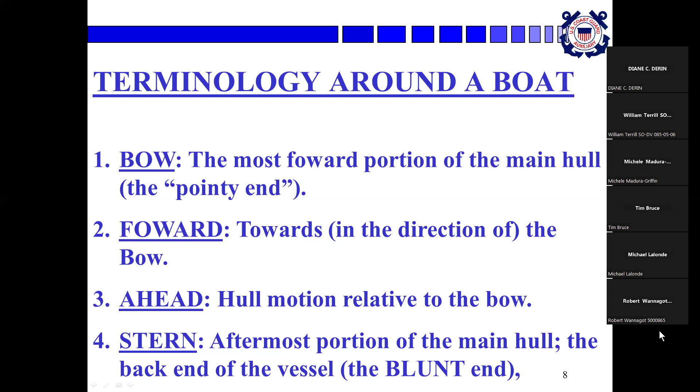Terminology of the boat. Everybody knows that the bow is the most forward portion of the main hull, the pointy end, and forward means anywhere towards the direction of the bow. Ahead is a motion relative to the bow, so the ship was moving ahead. The stern is the aftermost portion of the main hull, the back end of the vessel, the blunt end for most ships and boats.

Aft is the direction of the stern, towards the back end of the boat. And astern is the direction of the hull's motion relative to the stern, which means you're backing up, a backing motion relative to the bow.

Sides: looking towards the bow from the stern, on either side of the keel. The right side is always starboard, your left side is always port.

First terminology: there are no right or left sides on the water, again it's only port and starboard. Beam is the widest point of the hull, gunwale to gunwale. Athwartship is any measurement made from one side of the hull to the other at 90 degrees to the keel, so you can measure that anywhere you want, up or down, as long as you're measuring across — that's athwartship.

Terms denoting hull shape. Sheer is the curve or sweep of the deck from bow to stern of a vessel when viewed from the side, which we're all used to looking at. Flare is the outward curvature of the sides of a boat near the bow, looking head on, which helps keep the vessel's decks drier, usually on a motorboat moving fairly fast.

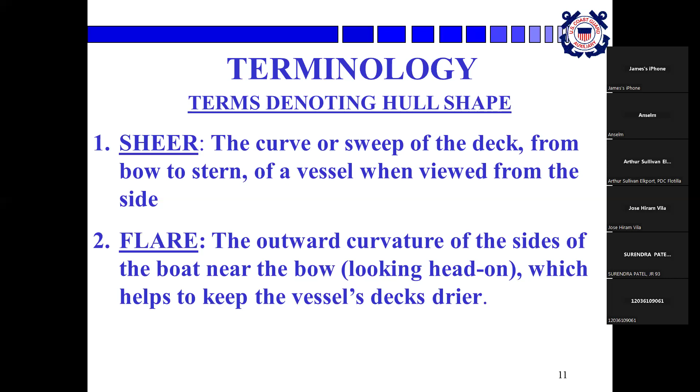The hull's bottom: a flat bottom has little or no lateral curvature when viewed from either the bow or the stern, so we know what a flat bottom boat is. A round bottom, when viewed from the bow or stern, shows a definite roundness, curving down and inward from the deck towards the keel.

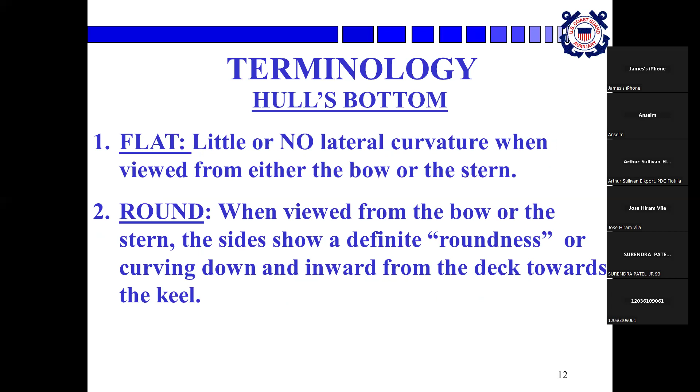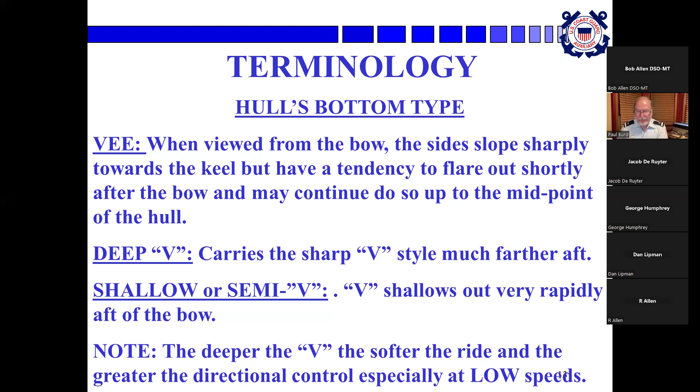Now the V. When viewed from the bow, the sides slope sharply towards the keel, but tend to flare out shortly after the bow and may continue up to the midpoint of the hull. V's are very common in our boating public. A deep V carries that sharp V style much farther aft, designed to give a better ride. A shallow or semi-V shallows out very rapidly after the bow. The deeper the V, the softer the ride and the greater directional control, especially at low speeds.

Displacement: when loaded, it sits low in the water. The flotation depends on the amount of water displaced by the hull, meaning the water displaced is greater than or equal to the weight of the vessel. Displacement hulls are usually slower vessels. Planing hulls sit up on top of the water, fast moving; flotation does not depend as much on the amount of water displaced by the hull, but on load capabilities from dynamic actions between the hull's bottom and the water's surface. This has a lot to do with efficiency, the way it moves through the water, which is why some hulls are designed as displacement hulls and others as planing. If I remember correctly, the Coast Guard's 44-foot motor lifeboat has displacement design on the front and planing on the rear, designed specifically for heavy weather.

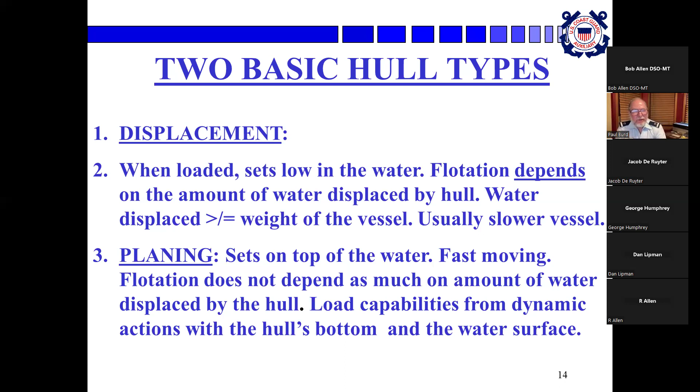Okay, planing hull. The planing hull is designed so that as soon as you get some speed, the hull gets up on top of the water. That way it's much more efficient, and there's less drag. You know the drill.

The trunk does not extend fully from gunnel to gunnel, it has walking space on both sides - that's the cabin. The raised deck does extend all the way from gunnel to gunnel, and there's no walking space on either side. Those are the two basic cabin styles.

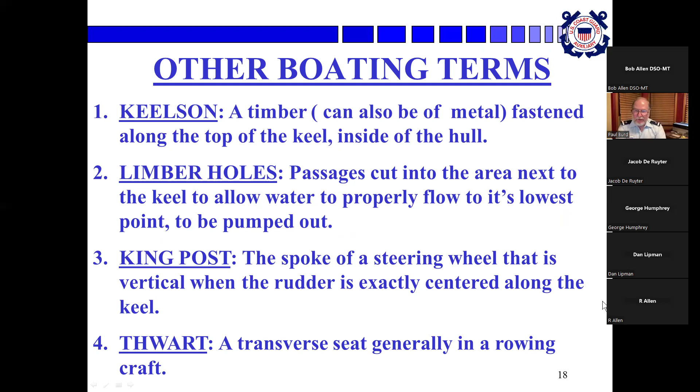The boot top, that's the general area of the exterior hull at the waterline. A lot of boats have a little line painted around it too.

You'll see it often. A thwart stanchion, that's a vertical support for the transverse seat. So if you've got a seat that sits across your rowboat, that's the thwart, and the stanchion sits underneath it, because if you're heavy like me, it might be too much weight for it. Next.

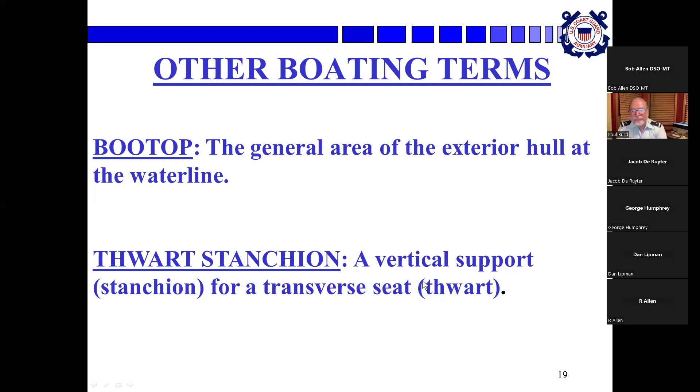Other boating terms, the boat motions: pitch, that's the up and down vertical motion of the bow as the boat rotates around its lateral axis. Roll, that's gunnel to gunnel motion of the hull as it rotates around its longitudinal axis. And yaw is a swinging motion of the bow from side to side as the hull rotates around its vertical axis. We've been going through this fast because I know you guys already understand most of this, but we do know the pitch versus the roll.

Some people - let me put it this way, we've had bad experiences with pitch and stuff. So next.

Dangerous boating motions. Broach, that's downhill, at a fairly high speed, the bow sharply digs into the surface. If floods are significant, it washes the main decks. And capsizing, what's that?

Capsizing, that's when the vessel rolls over, bottom up. You almost don't recover from those.

Pitch poling is commonly following a broach and loss of direction control. The bow plunges deep, turns sharply to one side, the vessel rolls and capsizes - a violent, potentially lethal maneuver.

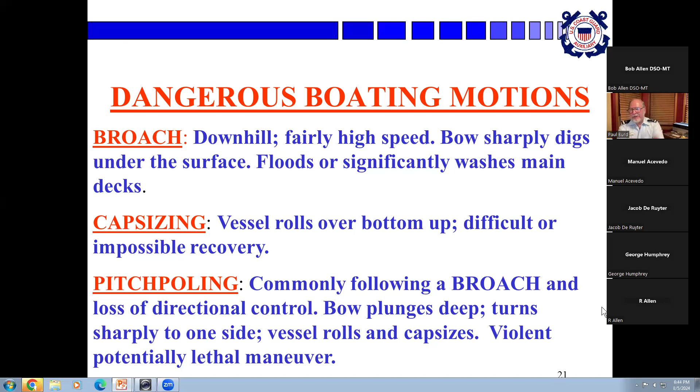Next, sailboat configurations. Identification depends on the number of masts and the sails and where they're placed. The graphics which follow are highly simplified examples.

I know that everyone has seen a sailboat and some of the different riggings that are out there, but we'll go through them. For the test at the end of the chapter and at the end of the course, these are the things you'll need to know. So next.

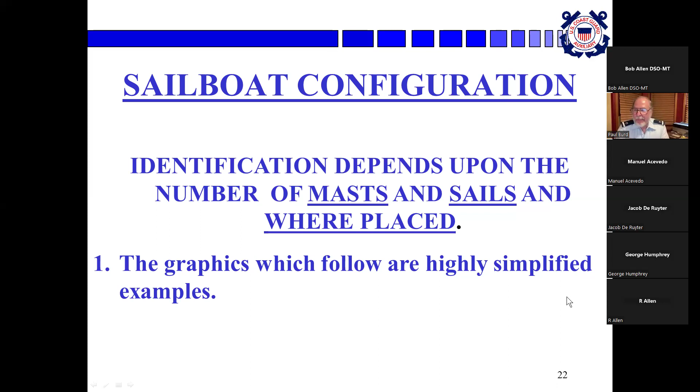Catboat configuration, that's the simplest of them. You could even have a rowboat set up this way as a sailboat. It's a simple boat, single mast, one mainsail, usually in the front, and very simple. Some people are really good with these things, they even race them. This is the catboat design. Next.

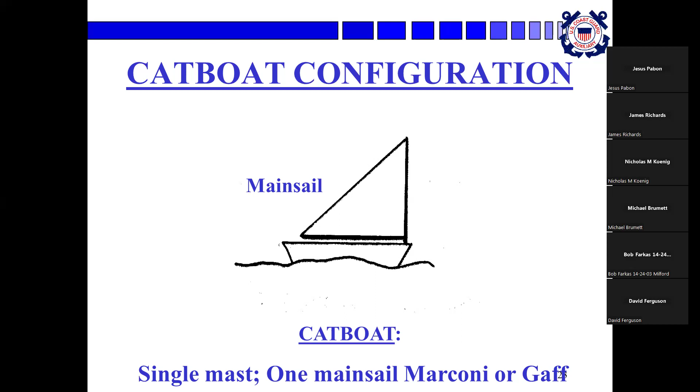Sloop configuration has the mainsail and a jib, and that's a really common setup for a sloop. It's the mainsail and the jib with only one mast, and it's forward, usually mounted forward in the boat. Next.

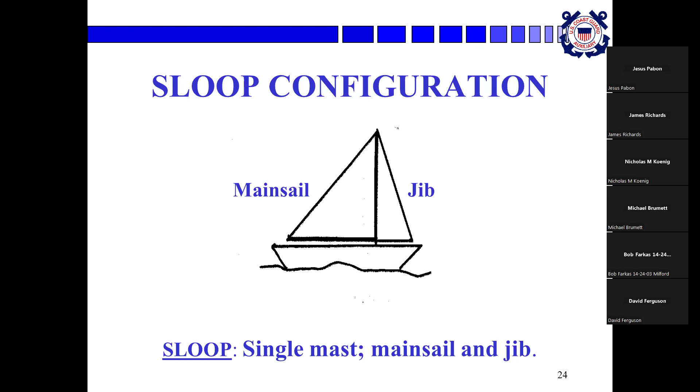The schooner configuration has a main mast and a foremast, at least two masts. The main aft is taller, the foremast is forward, and it may carry a lot of sails depending on the configuration of the schooner.

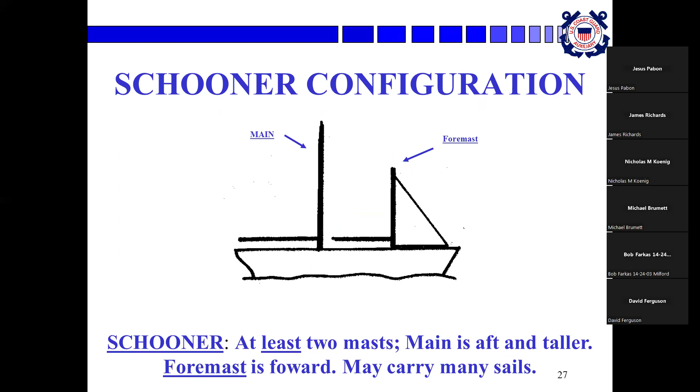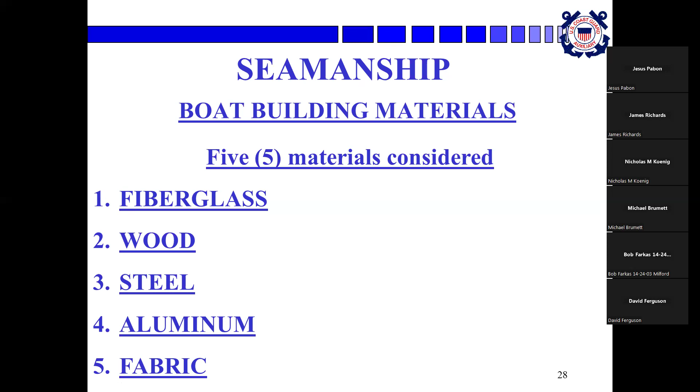Seamanship: boat building materials. We're going pretty fast here, guys. The five materials considered are fiberglass, wood, steel, aluminum, and fabric. I think we're considering Kevlar as part of the fiberglass group, but those are the five main materials we're building boats out of these days.

I noticed you're going out of order on the question. Say again, please? For each chapter, whenever you were going over the different types of characteristics of sailboats, that was on 114. And I'm trying to keep up. Oh, okay. Hey George, if you've got more questions, go ahead and type them in the chat, and I can answer them there. Okay.

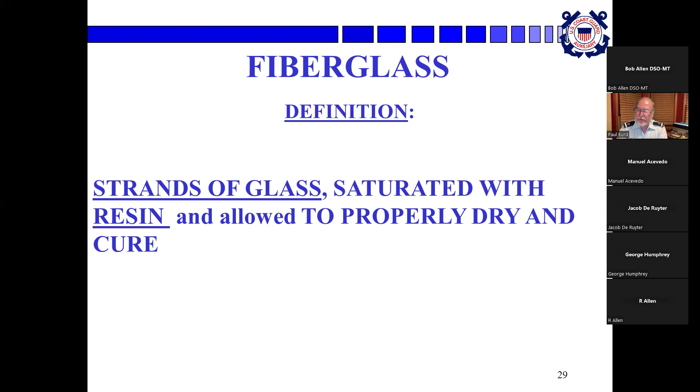Fiberglass definition: strands of glass, which is synthetic glass, saturated with resin and allowed to properly dry and cure. Those are the two variables there, dry and cure.

The types of fiberglass - they usually use all of these. There's fiberglass mat, which is like a cloth but a little heavier. Then there's fiberglass cloth, which is smoother. And then there's woven roving, and then there's the chopped strands.

When you're laying up a fiberglass boat, we'll get into that a little later, but typically you start with the gel coat on the outside, then add some mat, then usually the fiberglass cloth, then add more mat on top of that, then woven roving. Between each layer you saturate it with resin or epoxy, whichever you're using, and keep laying it in so you have several layers.

They're all for strength, but the woven roving is a heavier fiberglass mat that adds a lot more stability. The fiberglass cloth is smooth, which allows it to finish up easy. The mat depends on the situation. With chopped strands, some boats are constructed now where they don't even use the other types - they just take a blow gun and blow the strands in there.

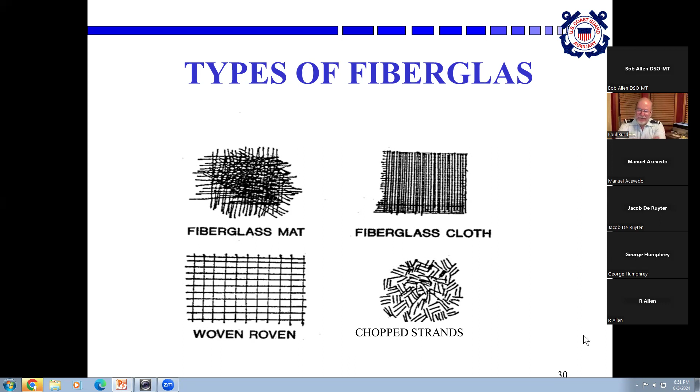Now, fiberglass, of course, is the most popular building material. And of course, the big reason is because of ease of maintenance. But it's also a material that doesn't take a huge amount of skill to work with.

The things you have to be careful of is making sure you mix the hardener correctly, so that you want it to dry, but you don't want it to dry too fast. If you mix a little too much hardener in right away, it'll set up in your bucket before you even get it in place. Those are the variables in building using fiberglass. When you're doing that in an industrial location, you've got it all down pat, you don't have to worry about it too much, but it's a very popular building material.

You can do an awful lot with it, and of course it's easy to maintain. It doesn't rot, and if you get a good gel coat on it, that gel coat will last just as long as the boat itself. And an awful lot of time, it may outlive you.

And now they've got enough experience with fiberglass that they don't have to make it really heavy. They found they can get by with a lot less material and still have the same strength and resilience that we used to need.

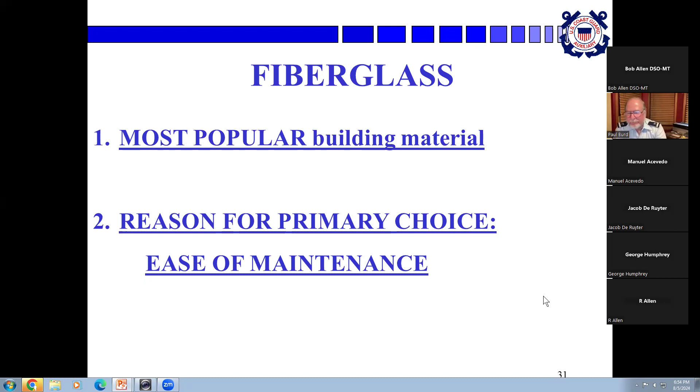Terminology: the fiberglass hull is composed of the matting, the roving, the cloth, and the strands of fiberglass when it's saturated with the plastic resin. It's very similar to a steel reinforced concrete.

There's something I was wondering about when going over this - for a while they were building some reinforced concrete sailboats, but I haven't seen much about them lately. They were popular for a short time back in the 80s, especially among home builders, but that seemed to go away. I think part of the reason is fiberglass is just so much easier to work with than building a frame out of steel and then building a mold around it and pouring concrete into it.

So anyway, fiberglass is - and of course now I guess it's kind of in the fiberglass family - the stuff they're using for Kevlar, they're building racing canoes and stuff out of Kevlar, and I think they're building some sailboats out of it as well, which gives you something that's incredibly light and incredibly strong. And again it's very easy to work with. You can mold it into so many different shapes and styles. It's a brave new world, I'll put it that way.

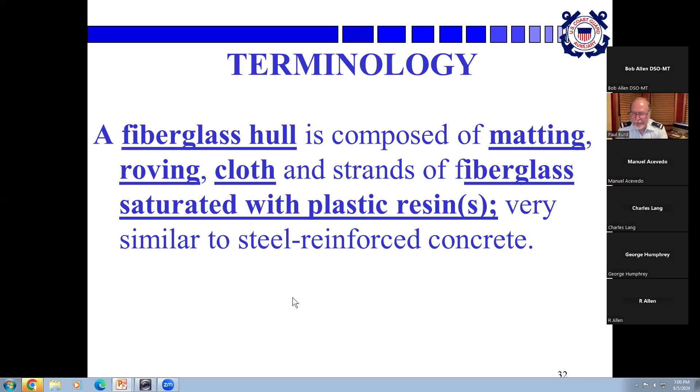Okay, advantage of fiberglass: it's impervious to marine animals and worms and borers, but it's not impervious to plants and stuff that attach themselves to it, barnacles, that sort of thing. Fiberglass does not rot, of course.

And also there are no seams or joints. A long time ago a few were built where you had a frame and then put fiberglass sheets over it, but it always ended up with seams, and you could never keep those seams from leaking. The nice thing about this type of fiberglass mold is it's one big piece with no joints to leak, and the color is molded in. You don't have to worry about it leaching out or anything, and it's really strong.

And again, you can mold it into almost any shape, whatever core you use for a plug. If you want to make it ripples or whatever else, you can mold it that way. And of course, it is low maintenance, especially compared to other hull materials.

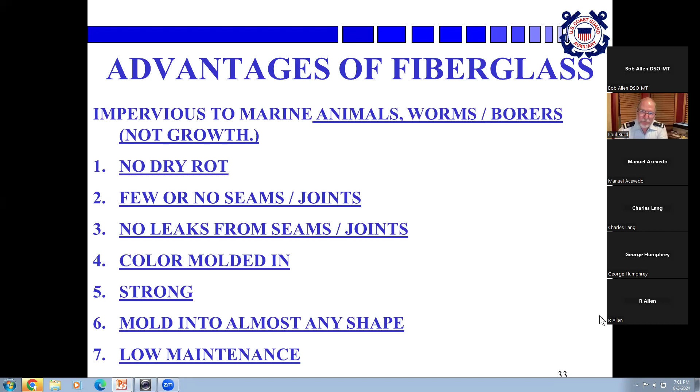Disadvantages: it's heavier than water, it readily sinks. I think it's the Boston Whalers that have a reputation for not sinking because they have that big core in the middle of them. But just straight fiberglass, like my fiberglass canoe without any flotation in the ends of it, will go down pretty quickly. Anything that's just straight fiberglass is going to sink - it's definitely heavier than water.

And that, of course, is the advantage of having one with a balsa core or something like that as well. The downside too is that it's easier to cover up shoddy workmanship.

You have to cut that sucker apart to figure out what went wrong with it. Of course, if you get people who deal with it all the time, they could look at the kind of break or puncture and assume some of the problems with it. But I remember a long time ago there was a boat company in Seattle building those things that decided to build a sailboat - they'd been building good power boats for a long time, and sailboats suddenly became popular, so they built one. As soon as they put a sling on it to pick it up, the keel fell off of it. So you kind of need to know what you're doing with that. But anyway, it's easier to cover up shoddy workmanship.

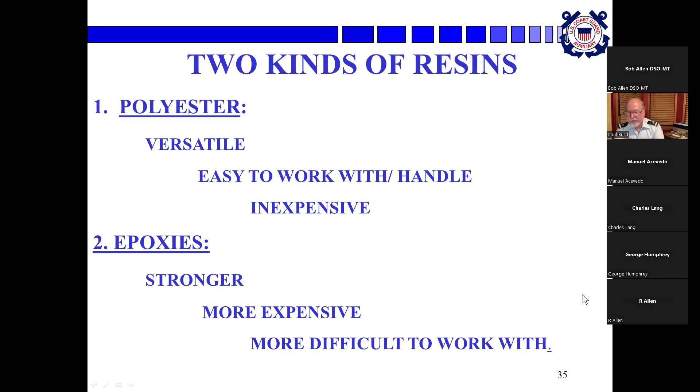Resin needs added hardeners. The resin by itself is the reason it's liquid - it comes in a liquid drum and stays liquid for a long time until you put the hardener in it. Once you put the hardener in, it sets up, depending on how heavy you mix it, it'll set up pretty quick. The dryers control the curing time, because you need things to cure properly before you can continue with the next part. Also, the stuff is highly flammable, so you've got to put fire suppressants in it - all the resins are extremely flammable, that kind of goes without saying.

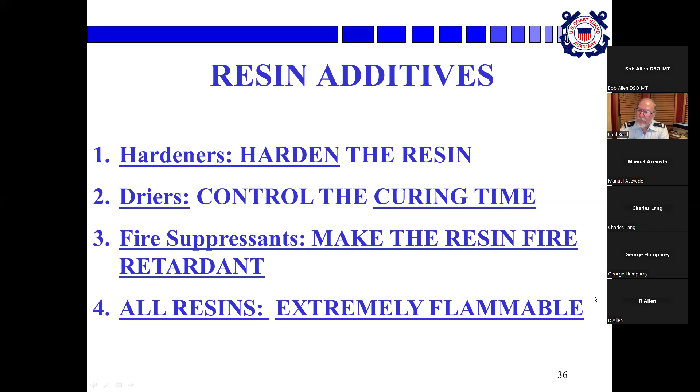Molds. The male mold, the plug, is the exact size and shape of the object being molded. If you were building a Viking ship and wanted to mold the dragon's head on top, all you'd do is build something to that specific shape, and then use it for the plug - put the fiberglass around it to make the cavity mold, which is the next version. Let me back up so I don't confuse anybody. The male mold, the plug, is what you use to make your actual mold off of. The plug is what you make into the exact shape you want, and then you make your cavity mold off of that, because then you can lay that down and do a hand layup inside it. You can also blow a chop strand into it.

And of course, the gel coat is applied first, inside the female mold. Before you put the gel coat, at least the way we always did, we had to wax the mold first so the gel coat doesn't become part of the mold, so that you can pop it out. The blowgun process is fastest, smoothest, and gives the best results.

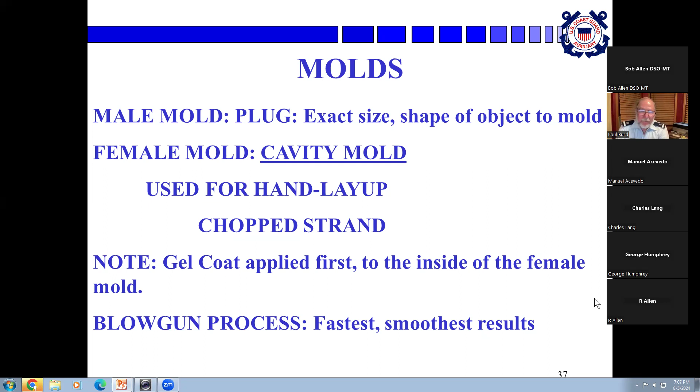Again, if anybody has more experience with this, I'm very happy to hear your input. The molds - a match die, the male and female molds, are clamped together. They spray the material in and then pop them apart, and there you have it.

A long time ago, I used to do photography work for a company that did blow molding - their specialty was blow molding kayaks and canoes, as well as a ton of other stuff, mostly for the medical industry. Long story short, they could make a mold and make a product quickly and very precisely.

The laminate that's used between the sandwiches - there's balsa wood, foam plastic, plywood. Those are the things they're typically using nowadays. Next.

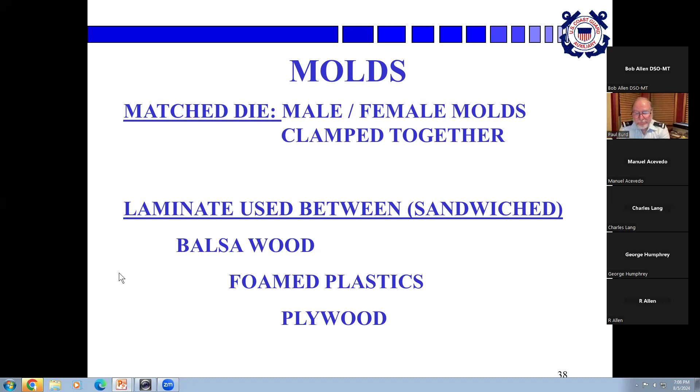In 1976, after I got out of the Coast Guard, I worked on a commercial fishing tender in Alaska that was built in 1912, 94 feet long, and solid wood, with a V12 Caterpillar engine and a big towing prop. Before I got on it, I was able to see it in dry dock in Seattle, so I had a really close look at the hull. Long story short, I was able to put a lot of confidence in that boat.

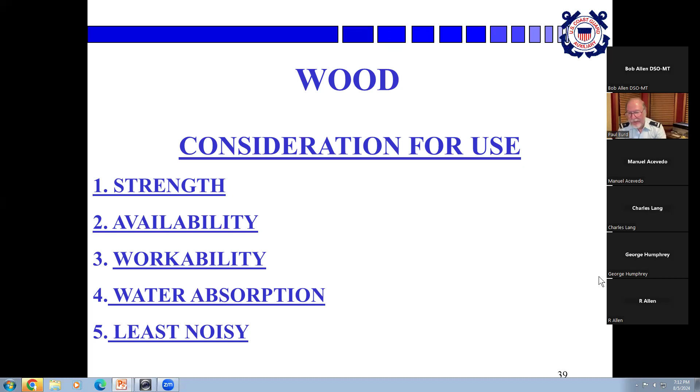I will apologize because I kind of get carried away sometimes here. So you can stop me if you want.

The hardwoods, ash, mahogany, teak, and oak, typically are more decay resistant, and the softer woods of cedar, fir, and pine are less decay resistant. But that's not always true. There are exceptions to both of those things.

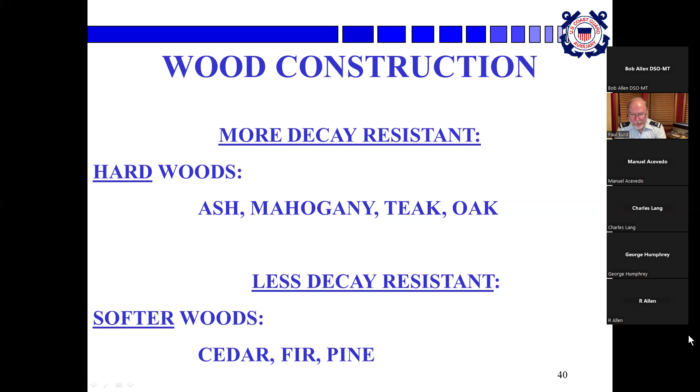Again, it points out. A lot of the yellow pine is still available, and it's considered a softwood, but it's harder than some of the typical deciduous trees that we consider hardwoods. And here in the Midwest, we've lost almost all of our ash trees. The only thing out there now is what's dead and dry, and once we use those up, ash will be gone. Hopefully our oaks will still be around if we still want to be using them for that.

The wood's number one disadvantage is dry rot. It's also highly susceptible to worms and borers, and it absorbs water and is relatively easily damaged. If you have a wooden boat and you hit a dock with it hard, and that happened to be a steel lined dock or something, you can do some damage to your boat.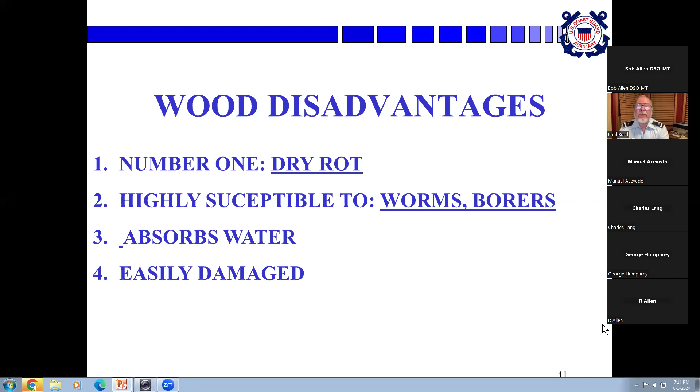Steel construction. The disadvantages of steel construction are that it has quick deterioration. If you don't keep it painted, don't keep up with it, then it'll rust away pretty fast. So you have to be right on it continuously, maintaining that steel hull and superstructure. My first duty station in the Coast Guard in '72 was on the Coast Guard cutter Pontchartrain, a 255-foot cutter made out of steel. And deck force, that was your primary job, was scraping and painting, scraping and painting.

And in fact, when we finally put it into the dry dock, they said the hull was thin enough that the only thing holding it together was the paint we'd all put on, all those layers. But anyway, steel definitely will deteriorate, so if you don't keep it painted, keep up with it, it does.

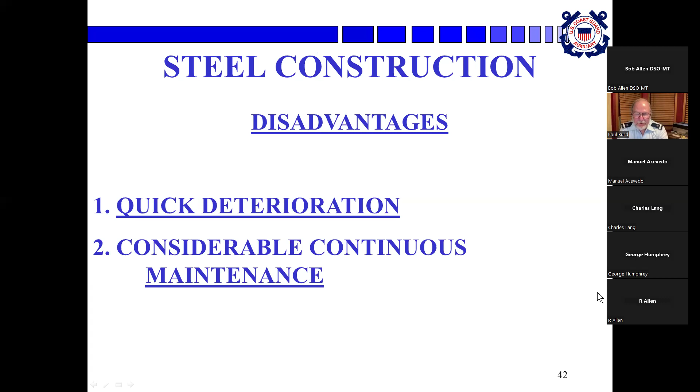It requires continuous maintenance. The advantages: it's the strongest strength to weight ratio. I'm not sure that's true when you consider Kevlar and stuff like that, but I don't think they're using it on large boats nowadays yet. For just flat out strength to weight, it can't be beat, steel. It's resistant to impact, doesn't wear out very fast, and it'll take a lot of abrasion before it's a problem. It'll withstand a lot of hits, and it's less noisy than anything else but wood.

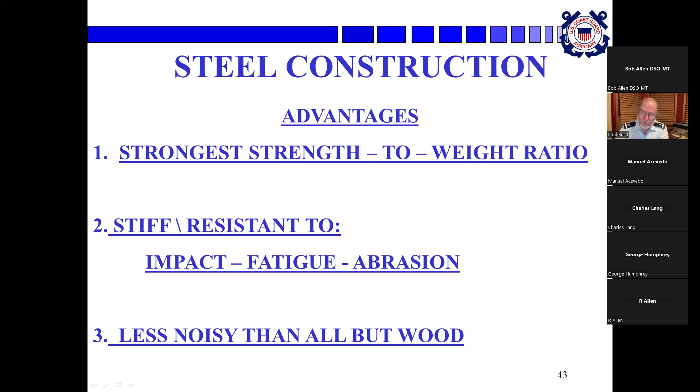Wood is still the quietest of the materials that boats are built out of. The advantages of aluminum, of course, is our other major metal that we're using. I don't think anybody's building out of titanium, but anyway, aluminum construction is lightweight, it's impervious to marine borers, though algae will grow on it. It's fairly easy to form, you can wrap it over a fairly good frame in different directions and do lots of stuff with it. Canoes are wonderful out of aluminum.

The disadvantage of the aluminum construction is electrolysis. It's definitely susceptible to electrolysis, and we'll get into that a little later. It's also a heat conductor, and it's noisy. You hear a canoe coming down the river and it hits something, or you hit the paddle in it, and you can hear it a long way away. It does dent really easily, so you have to be kind of careful with this stuff. That's also true with the bigger hull boats. You can put a dent in it pretty easily, whereas with a steel boat you'd be putting a dent in something else.

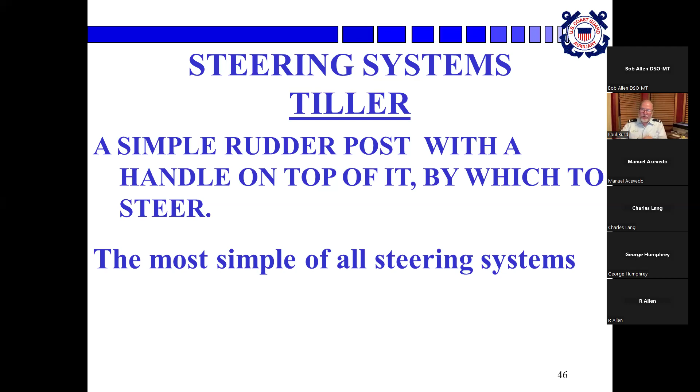Steering systems: the tiller, a simple rudder post with a handle on top by which to steer. Rudders have been around a really long time, they figured that out when they first started floating on logs and whatever. In a canoe, you're using your paddle as a rudder, when you make your J stroke to steer it. That's a tiller, the simplest of all steering systems, there's not much that can go wrong. There are still sailboats and smaller boats out there with tillers now. The handle turns it, and the rudder is attached to it and turns in the water, which turns your boat. Whichever way you want to go, you just turn the tiller and the rudder will make it happen.

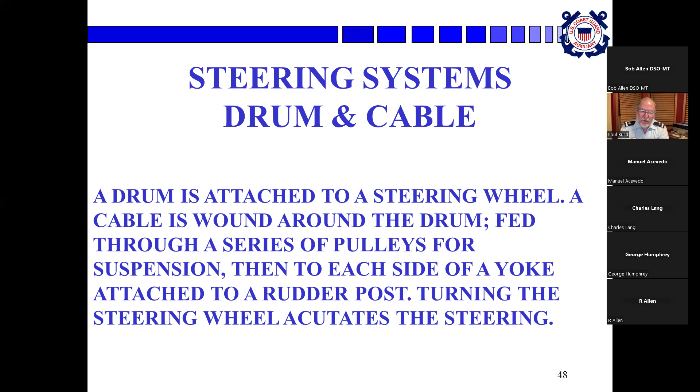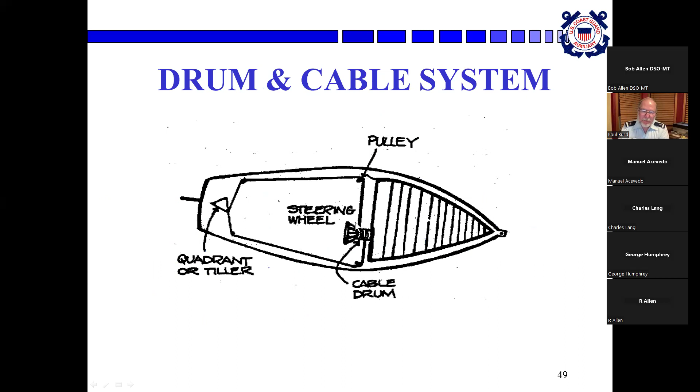The drum and cable steering system is relatively straightforward. You have a steering wheel, and the drum is attached to the steering wheel. The cable's wound around the drum, then fed through a series of pulleys for suspension, and then each side of the yoke of the rudder post is attached, so that when you turn the wheel, it takes up the slack on one side and turns the rudder, and turning the other way turns it the other direction. It's a fairly simple setup, though I don't know how common it is. Here's your steering wheel, cable drum, and the quadrant or tiller, again it's a cable system.

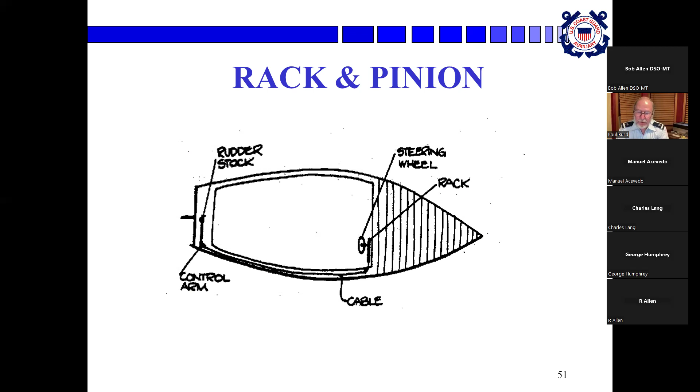Rack and pinion. Most of our cars have rack and pinion steering now, where they used to have the other setup. The bottom of the steering wheel has cogs on it that sit into a flat rack that has cogs in it, and when you turn the wheel, it moves the rack one direction or the other. There's a cable tied to either end of it, and it's apparently a very precise system, giving you a little more control. But again, it's just another way to set up the boat to steer.

Steering cable, the rack and pinion - the steering cable is enclosed in a conduit, and of course the pinion gear is attached to the end of the steering shaft and to one end of the rack, which is attached to the other end of the cable.

The cable also attaches to the rudder post or the outboard engine. Turning the wheel translates into turning the rudder or the outboard engine. I think most of our boats that have an outboard engine, that will still be usable. Anyway, that's the rack and pinion.

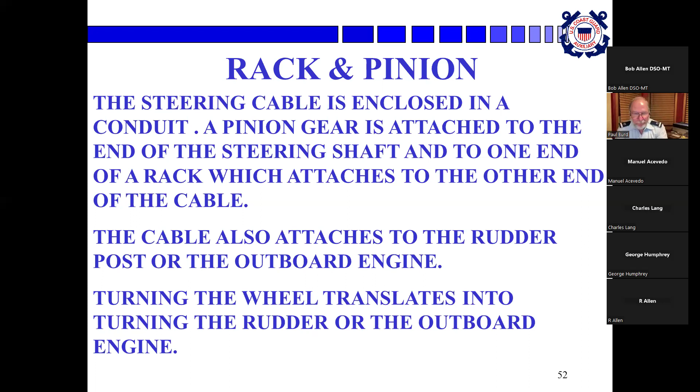The steering systems, the gear and the shaft - that's normally what they used to put in cars as well, and they still do with some of the bigger ones. But that's usually not put on a small boat. It's a series of worm and bevel gears, attached to a steering shaft, which again translates the directional force of steering.

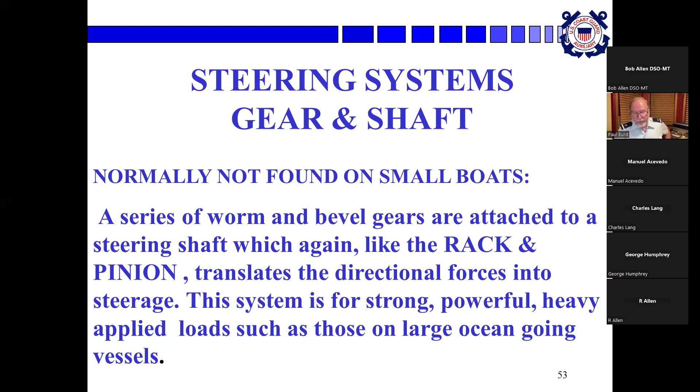They use that on tractor trailers some as well. It's for strong, powerful, heavy applied loads, such as those on large ocean-going vessels, or somewhere there's a chance of a heavy force - something like in tractor trailers. If you're driving and you hit a curb with one of the wheels, it can jerk the wheel. That's the kind of system that's on it - gear and shaft, okay, for larger vessels.

Next. Gear and shaft again was for the larger vessels.

Then the hydraulic systems - that's similar to the ones found on automobiles. You have power steering in your car, that's typically a hydraulic system. The hydraulic fluid is under pressure. Steering cable changes are translated into turning motions of the rudder or the outboard. That's also how the brakes on your car are set up, using hydraulic fluid, same kind of setup. But the hydraulic systems, you wouldn't typically see that on the smaller boats, as far as I know. I could be wrong - you guys have more experience with that than I do.

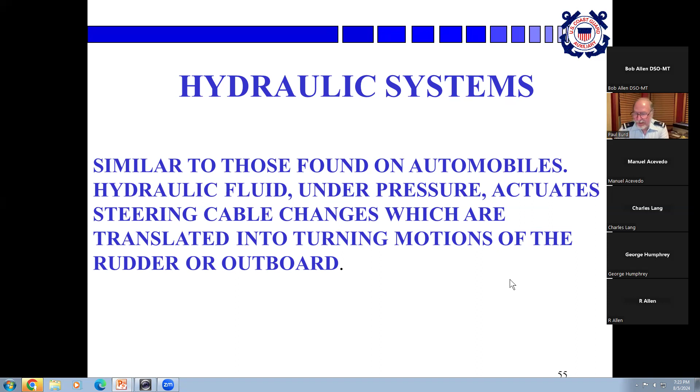Alice is wondering, do most pleasure boats have rack and pinion steering? I think she's thinking about inboard/outboards. I think she probably is, and maybe some of the other people could tell, because I haven't been on anything new in a while. When this thing was written, it didn't say which one is the most popular, so I don't know.

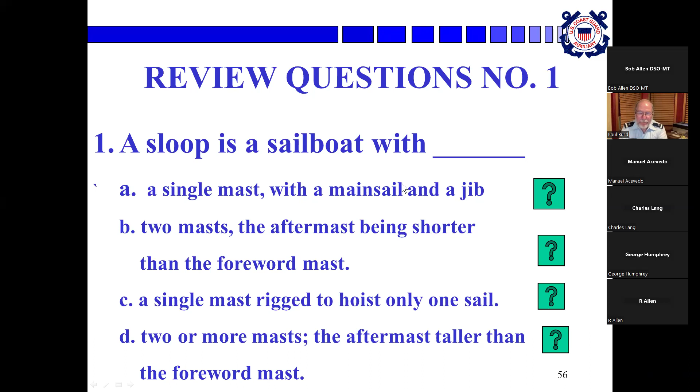Number one: a sloop is a sailboat with a... anyone? Let's go backwards - see if I click on here, it gives the answer. Oh, it does tell us the answer. Yeah, A, there we go.

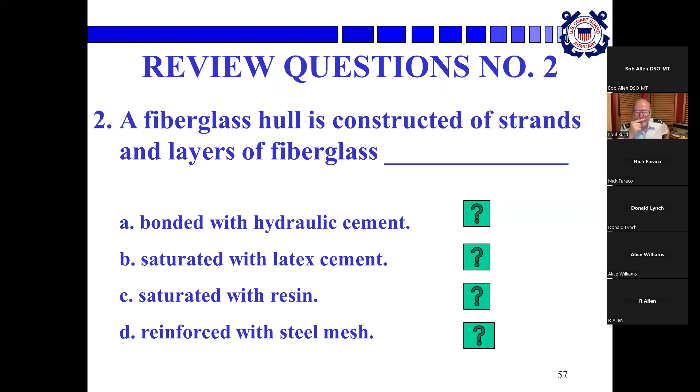Number two: a fiberglass hull is constructed of strands and layers of fiberglass. How do they keep... C, C. Uh-oh, my computer's not gonna let us do it the good way. See if I can do this one other way. No, all right. Number three: so C - anybody else have a different answer than C? Let's see if I can go back here. Saturated with resin. Good, yes, C.

Three: on a strength to weight ratio, sheet steel is A, stronger. It's good.

I don't have those questions apparently. Yeah George, I think they're in the back of your book here. These are different than the ones that are in the book, George. All right, number three - where are we?

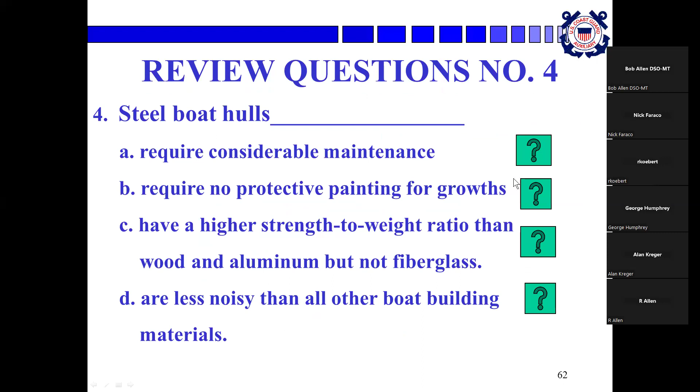Four: steel boat hulls - what? A sounds good, A, require considerable maintenance. A. Oh, that's what we do. Good.

The simplest type of steering mechanism for a boat is D, tiller. Tiller, good.

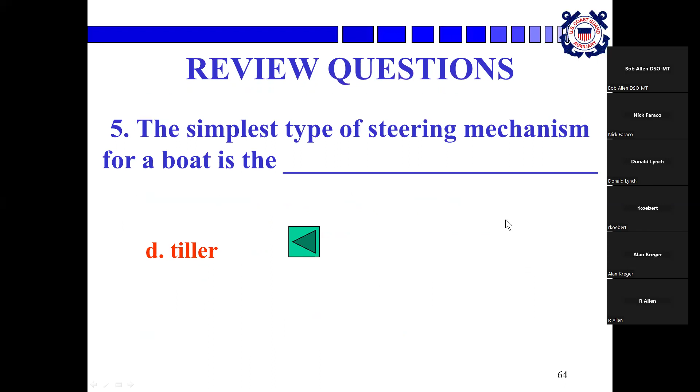Good, limber holes - this is a good one, you're going to see this one again. Hey, A, A.

The curve or sweep of a vessel - this is a tricky one, you really had to pay close attention to this one - as viewed from the side is called the what? C, C, good - sheer, good.

Sheer and flare get confused a lot. Eight: the outward curvature of the sides of the hull near the bow, what is used to keep the deck dry, is called the flare. Flare, right on.

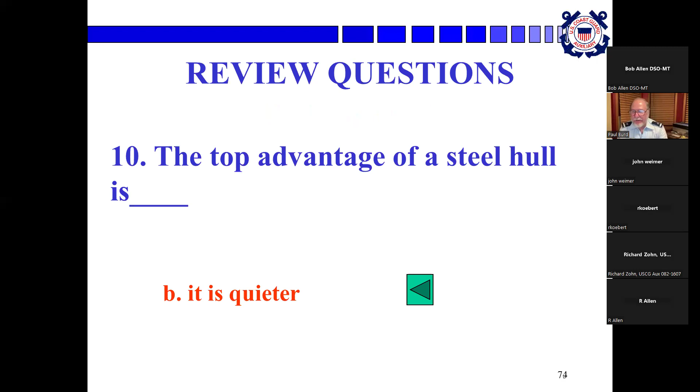That was a little counterintuitive. I thought wood was supposed to be quieter. It is quiet. Yes, wood is quieter. But it says in there that the steel hull is quieter than the aluminum and the fiberglass. That's the wood they're looking at there.

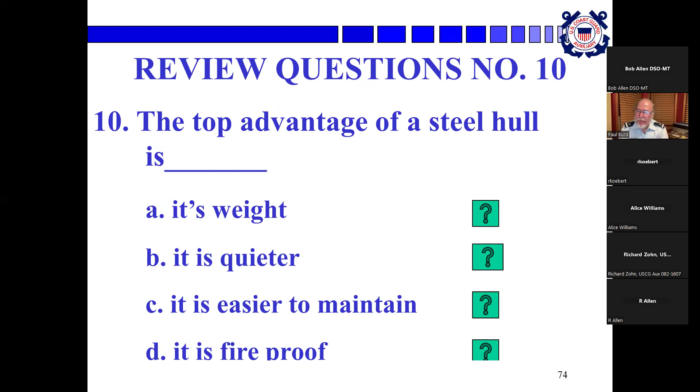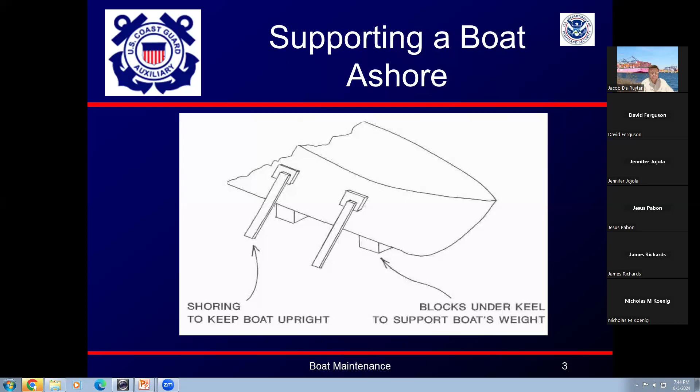Okay, so we're laying up the boat in the fall. Obviously it's the fall, so of course the first thing you want to do is clean the bottom of it off and get rid of all the growth that's been there, algae, barnacles, if you happen to be in salt water, whatever. Clean the bottom off, and then wash it and drain all the tanks and bilges. And then it says to fill and treat the fuel tanks.

And of course, especially with the gasoline we have now, if you fill those tanks up, make sure that you put in a stabilizer, and you can buy that pretty much at Menards or wherever. Make sure you put in a stabilizer so that your fuel stays in good shape. Of course they recommend you change the engine oil, and then remove the battery and perishables.

That fogging is when you put the oil in the engine, right? Yes, and I don't know that I've ever done the fogging. They recommend it. Yeah, I think it comes in a can, and of course fogging the engine you have to read your instructions because it would be different on a diesel than it would on a gasoline engine. Different on the way you put it in there. But to be true, well anyway, we'll go with what they say.

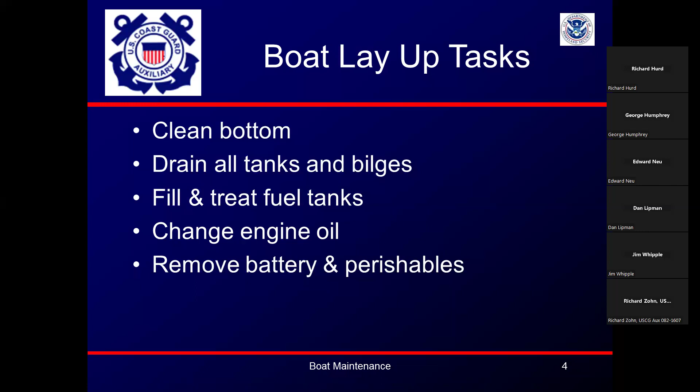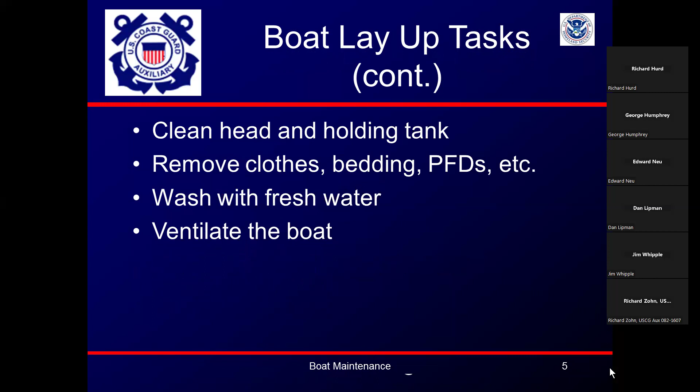Of course you want the perishables out of there, so go ahead. Clean the head and the holding tank, pull out any clothes, bedding, PFDs. Of course you want the PFDs out because they can mold in there just like everything else. Wash it with fresh water, then ventilate everything really well.

The bottom paint chemically slows down and prevents the vegetable growth, the marine animal growth, but you have to match the paint to the boat materials to prevent electrolysis. Now the bottom paints, basically I think most of them, are still a copper formula. Of course we get a little later in this chapter as well about making sure that you don't get the copper paint in direct contact with the aluminum hull if you have an aluminum boat. But anyway, bottom paint chemically slows down and prevents the vegetable growth and the marine animal life, and you've got to match the paint to materials because again it's to prevent electrolysis from being set up between, especially, a copper paint and an aluminum hull or something.

And also to consider the environment. We're going to try to keep our lakes clean and everything, so make sure that whatever chemicals you're using there are kind of approved for where you're at.

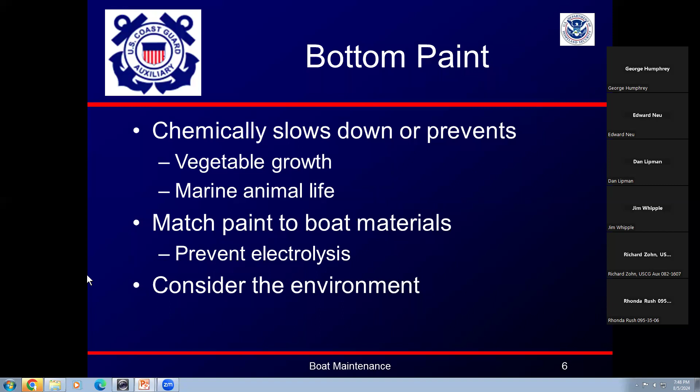Dry rot is a wood fungus that's thriving in fresh water. It doesn't seem to be nearly as pernicious in salt water, but on the other hand, if it rains or there's condensation, that's fresh water. So if you have wood, it is susceptible to dry rot. Dry rot has a distinctive odor, it spreads rapidly just like a mold, and you look for it in damp places.

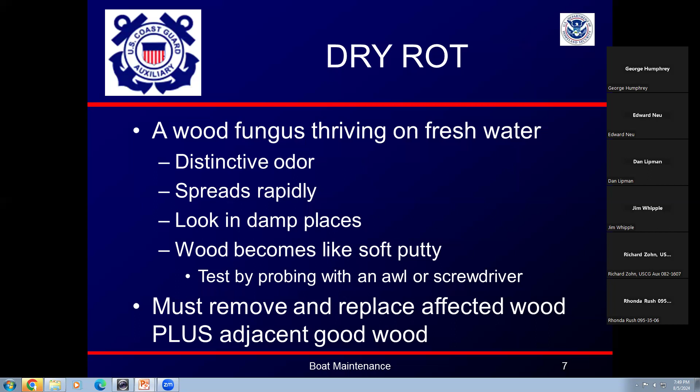The wood becomes soft like putty, and you can test it by probing it with your screwdriver or a pocket knife. And if you're going to repair it, you have to remove and replace all the affected wood, plus the adjacent good wood. It's sort of like filling your teeth, they make sure that they got all the decay out of there and into good solid material before they start putting the new stuff in.

Electrolysis is a galvanic action. It generates its own current because the current flows from less noble to more noble metals. There's a chart of which metals are more noble and which are less noble, but it definitely flows from less noble to more noble, and the less noble metal is destroyed when that happens. To offset that, they use a sacrificial metal. Zinc is the common one - they mount it on the hull, and it protects the valuable parts of the boat. Instead of destroying your bronze propeller, it destroys the zinc.

Next. And the answer, Alice, I don't know if there are different zincs. I just know that zinc is the most common one, and it seems to be in wide use. The next time you go to a marine store, you might ask them that.

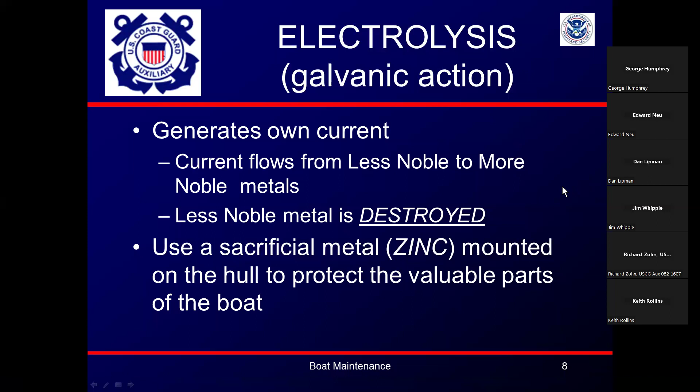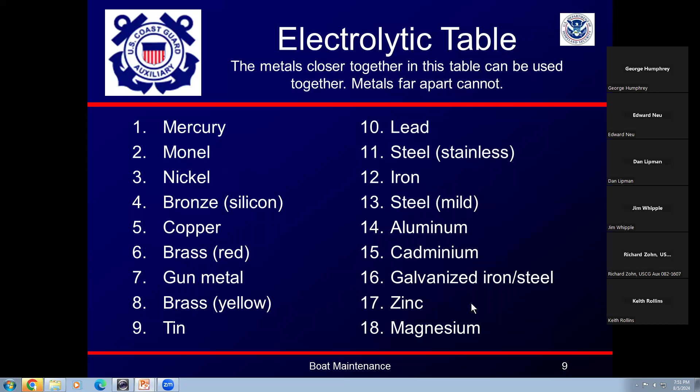Zincs - there we go, there are some zincs. You can see the zinc on the propeller shaft, the zinc on the hull. It's attached there and used so that the electrolysis will eat that instead of the other metals.

And those are just zinc plates - they're designed to be replaceable. How's that? If they're going to be eaten up, they're designed to be easily replaceable.

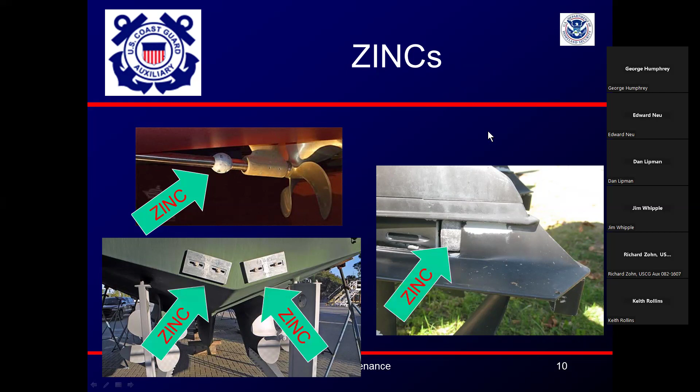All this metal stuff almost sounds like an anode - yes. Electrolytic action, not galvanic, depends on an external current. Where that current goes into the water, the metal is destroyed. The solution is to eliminate stray electrical currents. Salt water is kind of a conductor in itself, so the current goes into the water and that's where the metal is affected. That's electrolytic action - it depends on an external current. The first thing to do is try to eliminate any stray electrical currents running around your boat, which means make sure all the grounds are good and clean, make sure all your connections are good. I know you're familiar with electrical currents that run on the outside of your battery - if you let it sit, it builds up stuff between it.

Electrocution - stray currents that get into the water can endanger materials as well as swimmers. If you're in the Chicago area, you know they have an electric barrier in the sanitary ship canal to keep Asian carp out of Lake Michigan, and so far it appears fairly successful - it's basically an electric field that keeps them from getting close. All electrical circuits located near the water should be fitted with a GFI - I'm sure you know what a ground fault interrupter is, you can buy them at almost any hardware store.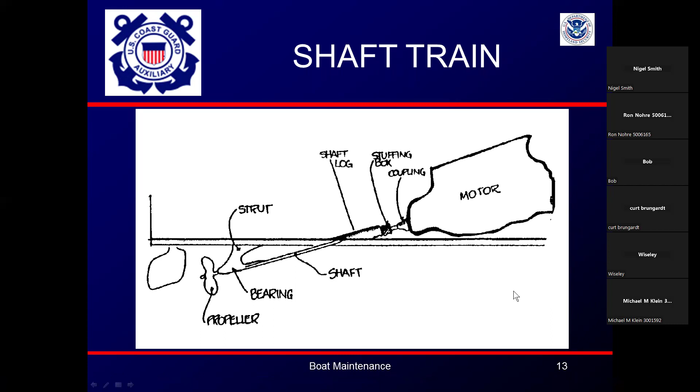The shaft and propeller are supported by a strut and a cutlass bearing. The big thing to understand about the cutlass bearing is that it relies on the water flow to lubricate the shaft. If the shaft was someplace else, like in your engine, it usually has bearings that rely on oil. These bearings rely on the flow of water to lubricate the shaft so that it turns freely.

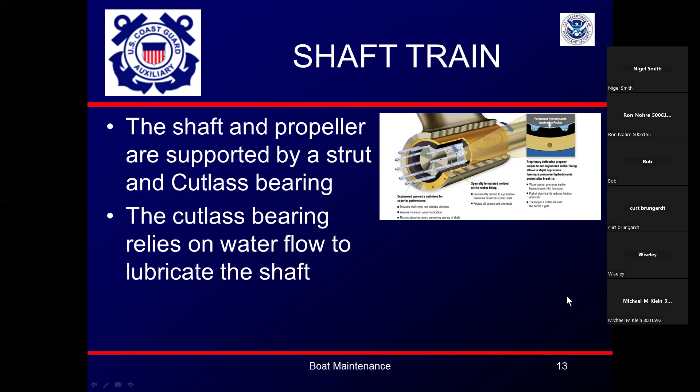Stuffing box: that prevents water from entering the boat around the propeller shaft. A slow drip of water is required to keep it lubricated because that shaft is turning inside the stuffing box. There's a packing material in there, usually a form of rubber, they gave the name Navidite or something like that. It's just like a washer in your faucet. If too much water comes through, you tighten down the nuts on the stuffing box and the gland, they call it, tighten down the gland nuts, and that keeps the water from coming in.

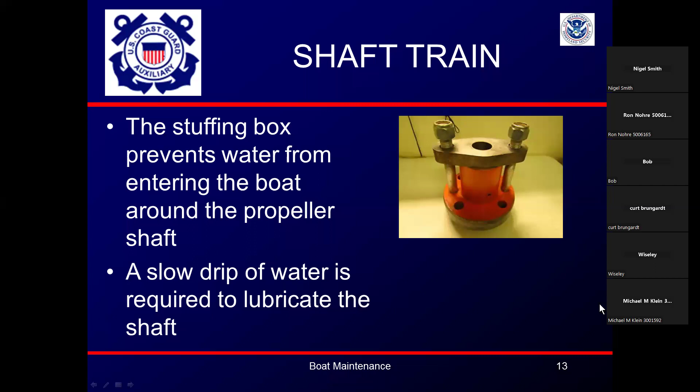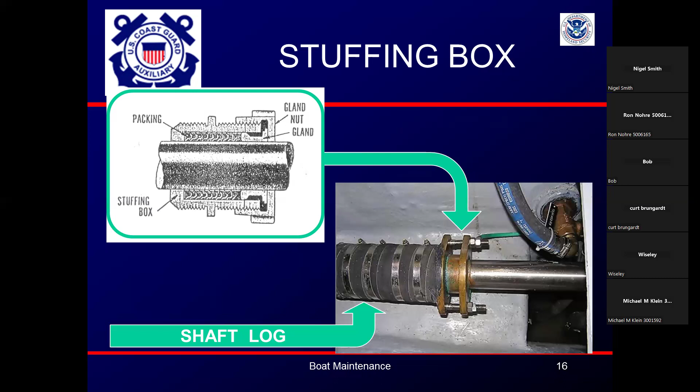Here's a close-up of them. You can see the gland nut and the gland, that's like the rubber washer, and then the packing material, and that constitutes the stuffing box. The shaft log, of course, goes through it. That gland nut is a fairly simple thing too.

That's the end of chapter 2. I guess we covered that one pretty fast.

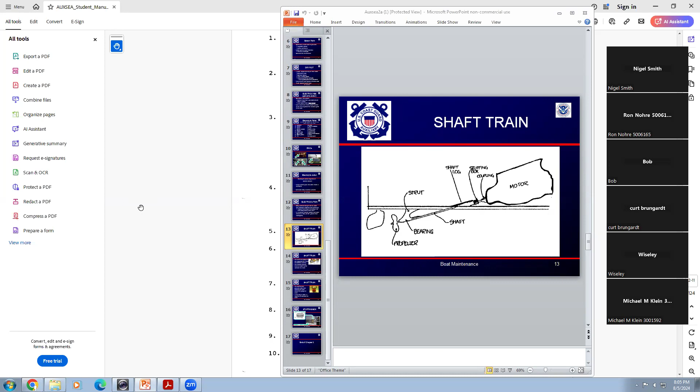Did everybody get that question and understand the answer? So it's on your 7029, but on AUX data, of course, you do it with the report there. Now, some flotillas still have people doing the recording for us, but most flotillas with AUX data want us to fill out our own information.

Does that include study time also? Yes, it does include study time, and anytime you're sitting here in class too. So be sure to log that, because our flotillas definitely want to see what we're doing.

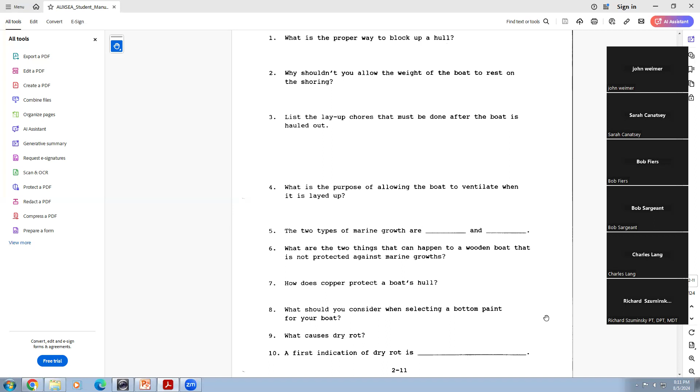The other metals in the boat. Yeah. Yes, the other metals in the boat, because one of the things I want to highlight, and Paul explained it very well, but if you have like aluminum and brass, they're not close to each other in terms of one's less noble and one's more noble. And if you don't have that zinc in there, man, that brass is just going to destroy that aluminum.

Right? Bob Sargeant, how about number 9? Also the environment there too. What was that, I'm sorry? Also the environment that you're in is the other consideration in selecting a bottom paint. Excellent, good answer, Bob Sargeant, for 9.

What causes dry rot?

Exposure to fresh water and salt water can also cause it, and keeping wood in it unventilated. They really focus on fresh water in the book. It's really a fungus that thrives in fresh water.

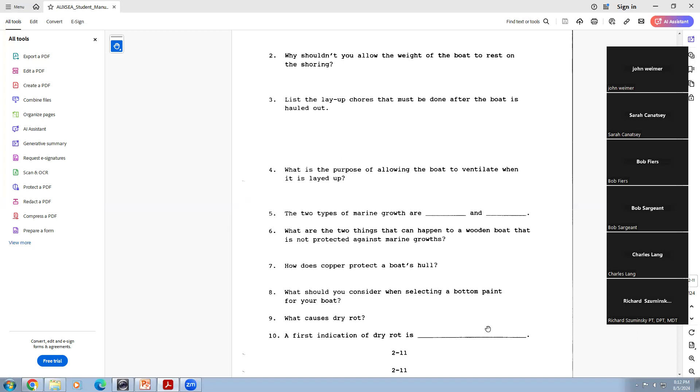All right, Charles Lang, how about number 10? The first indication of dry rot is? The smell. It stinks.

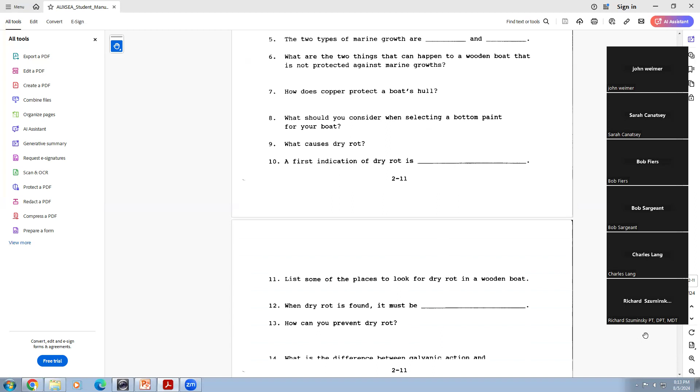Sorry, I wasn't unmuted. Richard S, list some of the places to look for dry rot in a wooden boat. The hull, also any of the wood surfaces on the deck.

Paul, what are the garboard strakes? What are those? You there, Paul? Did I lose you? Mr. Burd? Oh, you're talking to me. Tell us what the garboard strakes are. Okay. Wait a second, weren't expecting that question, did you? I threw that, that was unfair. Sorry about that, I was on the wrong page here. All right, we'll get back to you in a second. That was unfair, I threw that at you.

R. Koebert, is that Robert Koebert? Yes, Rob, how about number 12? Dry rot is found, it must be eliminated. Right.

Yeah, you dig that dry rot out, and you also got to take some of the good wood around it because you want to make sure you get it all out. And the garboard strakes, that's right next to the keel, is it not? Yes, right just above. That's a good place to look because you can have dry rot in that area.

So Richard H, how do you prevent dry rot? Mr. Hurd? Eric, can you unmute? Richard, are you still there? I'll keep moving. You keep it out of your boat, keep fresh water out, and use wood preservatives for all unpainted wood surfaces.

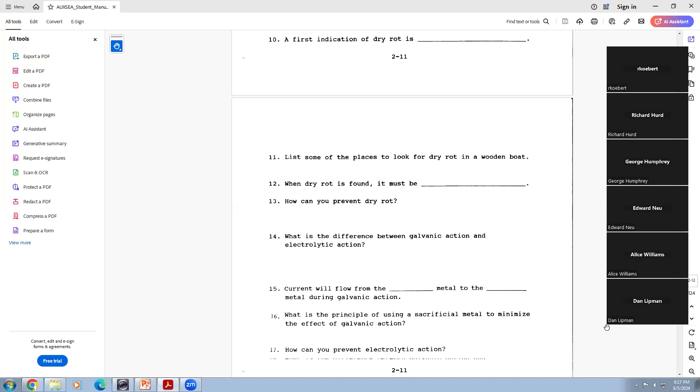Current will flow from the blank metal to the blank metal during galvanic action. Less, no, more. From the less noble to the more noble.

Good, how about Gerri Klemm, number 16? You want to answer a question here? What is the principle of using a sacrificial metal to minimize the effect of galvanic action? That one I couldn't figure out, sorry, I did every other one except the last couple. Well, Jim Giebfried, you want to take a crack at that one?

Number 16. Galvanic action destroys the third metal and saves the other two. Hi Gibby, good, yeah, the zinc one. So you want the zinc to break, not the aluminum, so the boat doesn't fall apart.

But don't you have to keep replacing that periodically so it doesn't eventually get to the other ones? Yes, if you were to lose that zinc or if it were to break down substantially, you want to put a new one on there so the more noble metal won't start chewing up your aluminum or whatever the less noble metal is that you have on the boat. Right, good, that's a little tricky.

Good. Keith Rollins, how can you prevent electrolytic action? You there, Keith? There we go. Am I on here? Affirmative. Okay, electrolytic action.

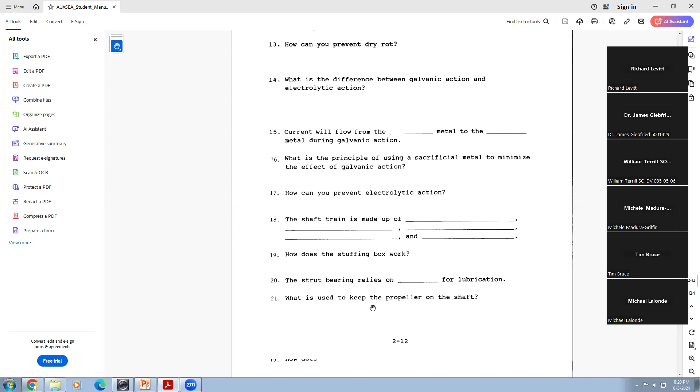Michele, question 21, what is used to keep the propeller on the shaft? You got that one, Michelle? You there? Yes, can you hear me? Yeah, go ahead, number 21, what is used to keep the propeller on the shaft? A lock nut. Most use a nut backed by a jam nut combined with a key.

That's it? Or a lock nut also. That's it. Mike Lalonde, I think I skipped one here.

Number 19, how does the stuffing box work? Mike, you there? I'm trying to give you a spare. Yeah, I'm here. It prevents water from entering the boat. It surrounds the shaft, holds the rings of the packing material, and it squeezes tightly around the shaft.

Sounds good. All right, next week we are going to get into chapter 3, internal combustion engines. You are all invited if you want to turn your cameras on so that we can all say good night.

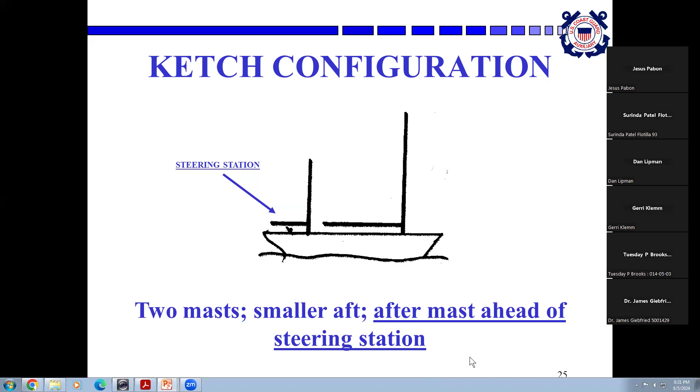Any other questions which we didn't answer here? Hey Bob, just a comment - this is, you delivered what you told us you would deliver, and it matched everything. The books, everything just fit right, at least it did for me. Thank you, and so somebody who didn't, stay after and we'll try to figure out because I hope I didn't send you the wrong manual or something like that.